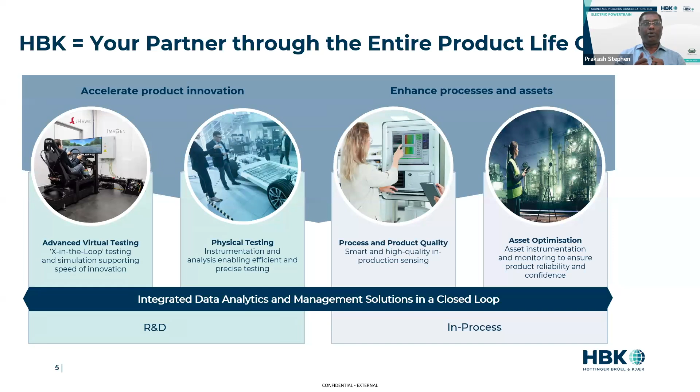So these are our main testing areas, providing complete test and simulation offerings. We divide our product portfolio into two processes, which are R&D and in-process. In R&D, we have virtual testing, for example our hardware-in-the-loop for driver simulations of track and NVH simulations. This leads to zero prototype testing. And how do we do it? It's not only complete virtual simulation; physical testing is a requirement.

And we have precision products, reliable sensors covering key physical properties, ranging from electrical, torque, force, pressure, displacements; data acquisition, high precision data acquisition systems, which help in gathering this data; and software, which gives you insights for user-friendly reliability testing and analysis.

Coming on from the R&D, once you have done your R&D, it gets into the production process. We have sensors built into systems where they can be used to bring actionable insights for precise and smart sensing. These are reliable sensors with high precision, with EMI proofs, explosion proofs. So this goes into the product on a day-to-day basis usage.

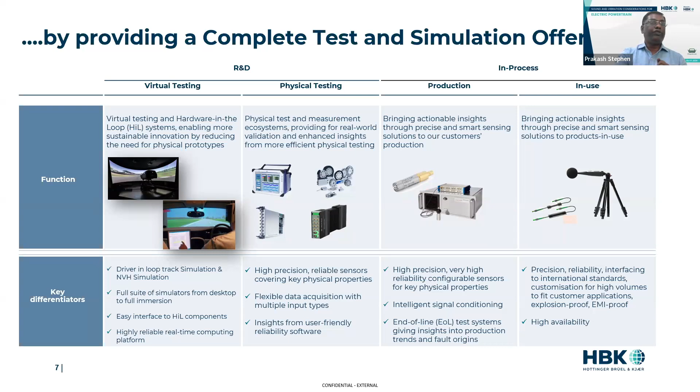2024 has been a very exciting year for us, where we have brought in a lot of innovations into the market, going right from your top left-hand corner, where we have brought in our fusion probes, which are specifically what Marjorie is working on today. And this is especially very useful where there are high voltages and high EMIs, which are there in your electrical vehicle testing or motor testing.

Then coming on to the data acquisition side, we have our eDrive software and hardware, which help you collect this voltage, accelerometer data and NVH data into one single source and help you analyze. So these are some very important new products that we have brought into the market.

And to those people who are already using a lot of other data acquisitions for different DAQs, we have also got our open DAQ architecture, where it helps to interface all the different DAQs on a common architecture so that you could pull in data as and when required from the different data acquisition systems. So that's our open DAQ platform, where lots of other companies are joining us to bring this out.

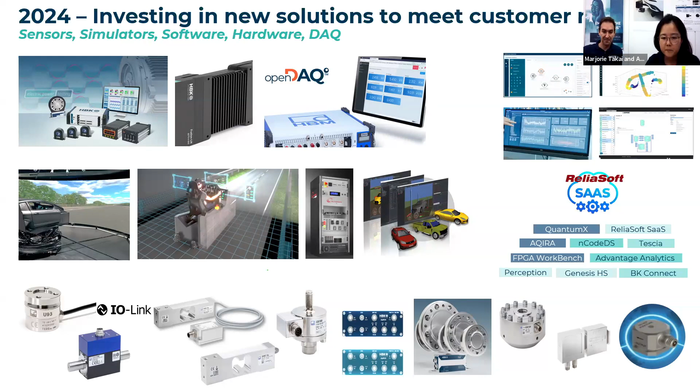And I will do the first part of it, and my colleague will do the second part. So my focus will be on the R&D, and my colleagues will be on the end of line side. So thank you very much for the introduction. So I think I will start here.

Everybody talked about the background. One of the things that I just wanted to emphasize, I've been working with the electrical motor side, but my experience is the sound side of it. So I've been working with sound since 2009. So it's been a while, and I've been working with different parts of it. So I think that we can bring this experience from the sound world into the motor world as we see things are transitioning to the electrical side.

So why should we care about the acoustics, noise, and vibration? Here we'll talk about two aspects of it, and here in the images, we are looking at a passenger car as an example, but it could be anything that has an electrical motor. For example, fridges or small appliances to big ones. So here is focusing on the customer experience of it, and that's the outer side of it.

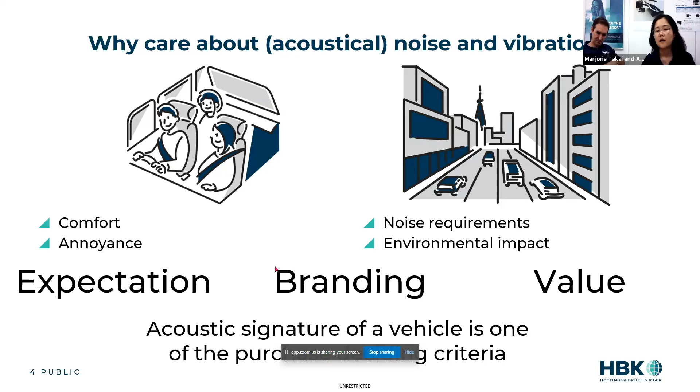So how does it apply to electric power drives? How does it apply to electrical motors nowadays? One of the things that I see very commonly is that we have the motor development, you develop the inverter side, and after you do everything, you throw it to the NVH team, and they do the measurements. But what is the benefit we would have if we do both at the same time?

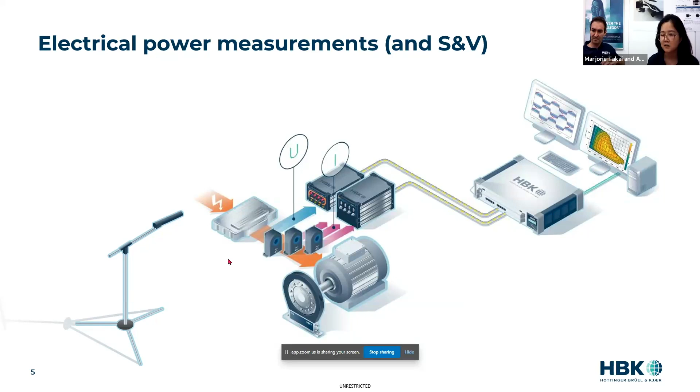Before answering this question, I will go through not the mechanisms themselves, but some of the causes of the sound, noise, and vibration that we have in electrical motors. Very briefly, it's just an introduction, so we can go through the problems.

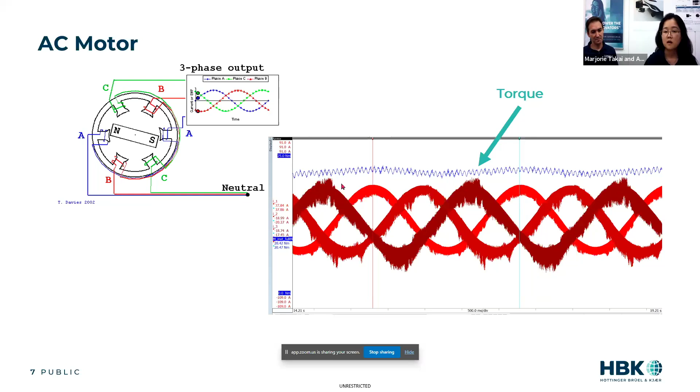One of the things is the constitution of the motor itself. When we excite the motor, because we want to make it rotate, not everything is done linearly. Any body wants to keep moving, but we block it. We have this cogging torque that is shown here, this zigzag line. We have the potential and it will induce movement, but we are trying to control this movement, so there will be an opposite force. It will have an impact on how the output happens. So the motor constitution itself will generate some of the sound, noise, and vibration when we excite the motor, because rotor follows excitation.

And secondly, there's the inverter. Here we have a schematic showing the battery, the inverter, and the motor. Of course, we don't connect the battery directly to the motor, otherwise we wouldn't have movement. The inverter has the role of controlling the motor, and when we do this, we end up having square waves. When you have a square wave, it can be decomposed into sine waves. That's the Fourier decomposition. And we have harmonics of the main frequency.

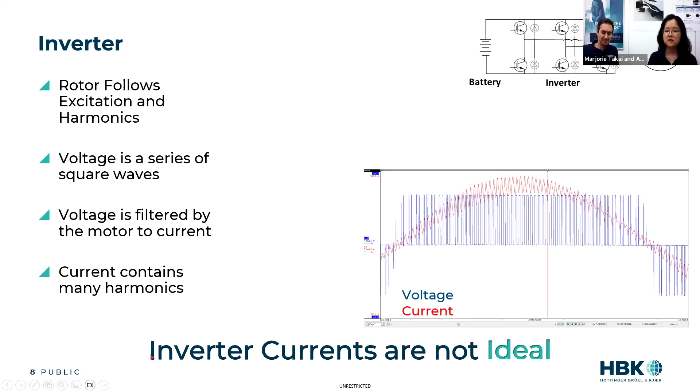So what it does, it injects a lot of harmonics into the system, and it affects the torque in the end. So the inverter affects how the torque output will be. For example, here, the inverter currents are not ideal, so it will inject some torque ripple into the system. And I will talk a little bit about it later.

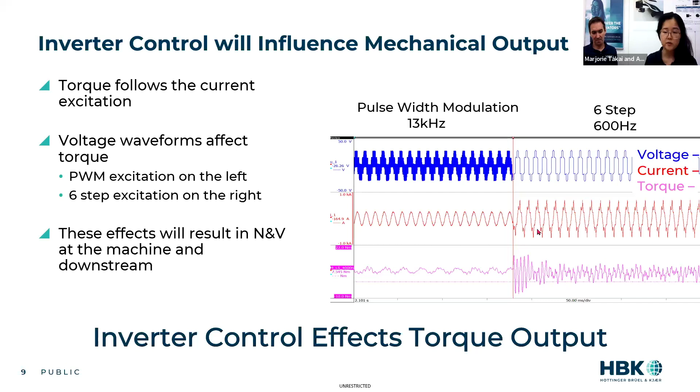Because here in the PWM, we have a kind of sinusoidal wave. We do have peaks and dips, but they are not as prevalent as in the second case. So the inverter control directly affects the output torque. So the second mechanism we are talking about broadly here is the motor constitution and how you control the inverter that's feeding the motor, and it generates torque ripple.

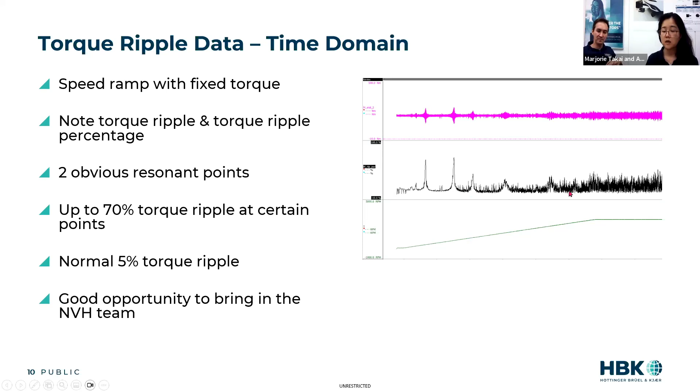So here we have the torque that went through the system. And in the black line, we have the percentage of torque ripple compared with the averaged torque. Here we can see something is going on, although we are just speeding up, and it doesn't happen in all parts of the signal. So that's one of the things that can cause noise and can be investigated. It's just a reminder that when doing this type of measurement, the torque ripple is very small compared to the bulk of the data, so we need accuracy from the sensors and the measurement system itself.

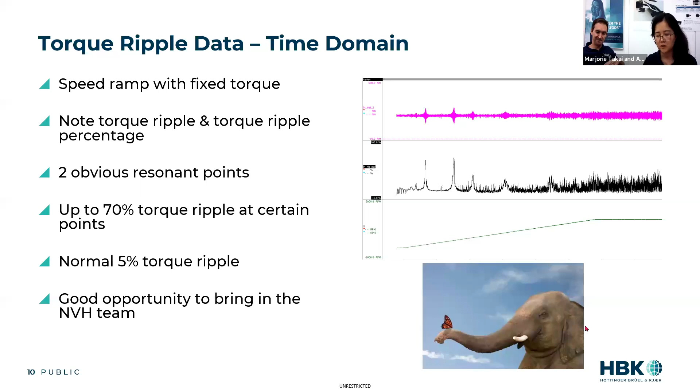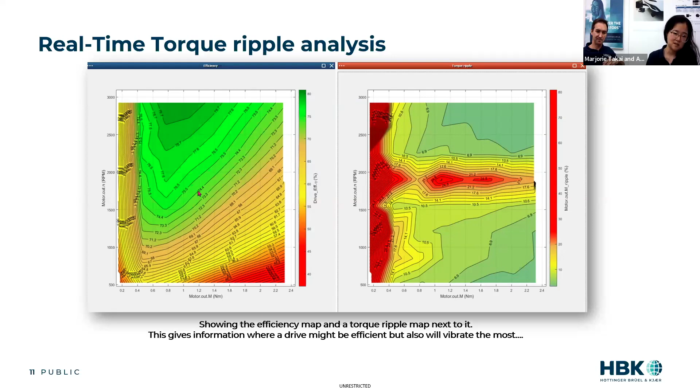So when you're designing your motor and your system and you've measured everything, you have a good efficiency map. Here we have the torque on the x-axis, the RPM on the Y, and the color plot is the efficiency. Oh, we found a very good spot to operate the motor. However, if you measure the torque ripple, it can show that a good operating region can actually be very bad for sound and vibration. I say it can be because in this case we didn't measure these two things together, but that's the thing. And now I'm going to talk a little bit about the benefits of having both measurements done together.

But one detail is very important. When you're taking this type of data all together, temperatures, vibration, the electrical measurements, the sound, you can of course use different equipment and different data loggers. But if you're going to use it to find the root cause of the consequences, that is the sound and vibration in the end, you need to have everything time aligned.

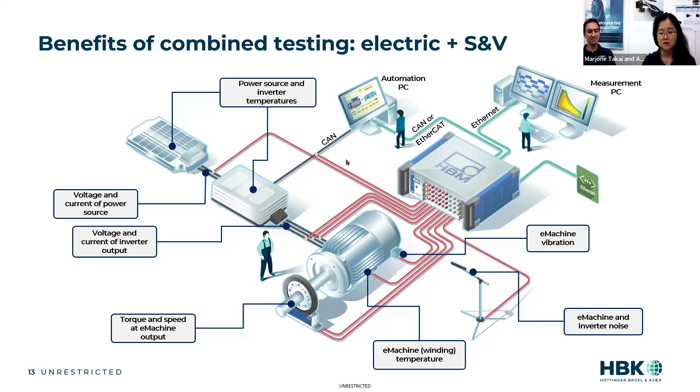Of course, the values are not going to be identical because the current is going through the system. It will have influence, but it will have a different characterization of it. But still, we can start to look out for what causes the noise, what causes the vibration from the electrical side.

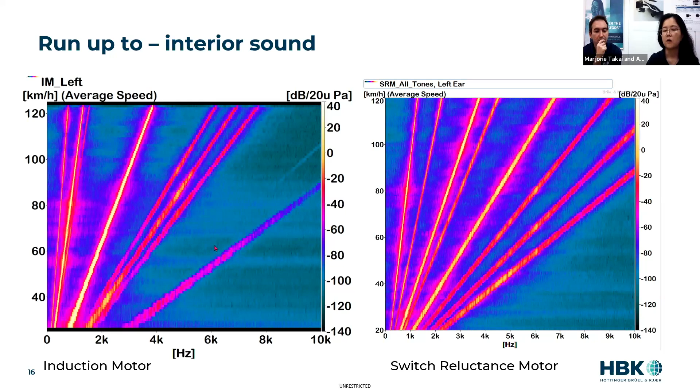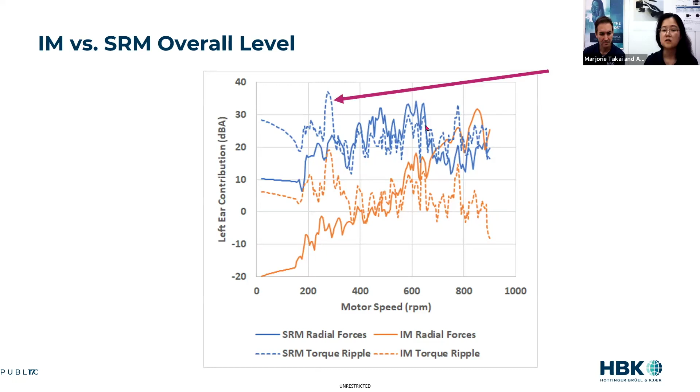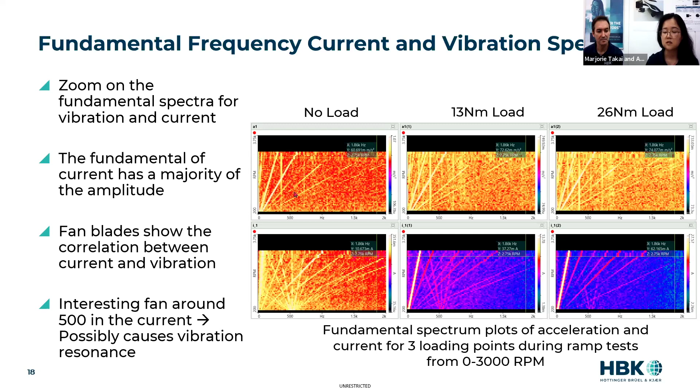So again, some of the benefits of having the electrical measurements with the sound and vibration. We can reduce costs. We can do both of the measurements at the same time. So we don't need to have one team to do the electrical, develop everything and test it, and then test the sound characterization of it. We can reduce this step. So we can develop it faster.

We can mitigate the noise in the control. We can change a little bit of the topology of the motor so we can have less noise. We can have easier communication between teams. We can now use this information faster. So characterize fatigue, failure. And my friend will talk about end of the line as well. We can start having how this motor will behave and have this information on our hands before going through all the steps until the end of the sound measurements.

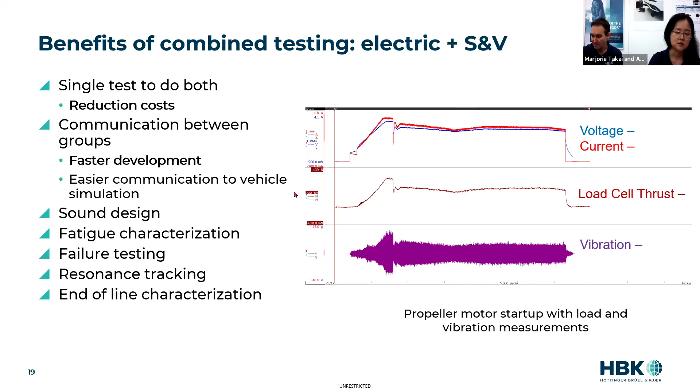So what do we provide as HBK? It's a little bit confusing sometimes because of the nomenclature, but our solution is called eDrive. And I know that a lot of electrical drives are called eDrive as well. So bear with me.

Here, one of the things that we are very proud of is that we do measurements with different quantities. Here we can measure voltages, currents, torque, of course, for the electrical characterization, but also include temperatures, microphones, accelerometers. We can check what we can input, but we can input a lot of things in the same DAQ system. So it allows us to have information broadly, time aligned, in one system.

Also, we are fast and accurate. What I mean by fast, we can have real-time data output. We can calculate some values and give them in hard real time. We are future-proof. That can have a lot of meanings, but for us, for example, if a customer wants to read some data from 30 years ago, they can, because we are very consistent in how we generate and read the data.

Also, maybe I'm using a motor today, but I want to expand. Will I have to buy another system? No, we can just expand the system that is already there and keep the same configuration for things that need the same configuration and be controlled by the same computer. You don't have to have different systems to measure the same thing.

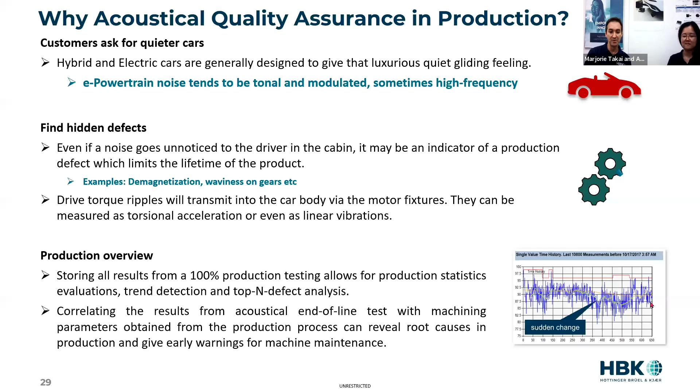So you also want to have an overview of your production. You are manufacturing hundreds of thousands of units every day. You want to know what's your performance, what's your scrap rate, and why I have such a good production, or it's not going so well on certain days, or whatever. So you want to have an overview of it and gain insight into it as well.

So NVH in end of lines, noise and vibration in end of lines, have a broad field of applications nowadays. We literally have hundreds of projects every year dealing with acoustic end-of-line control for e-drive systems as a whole, transmissions, gearboxes, gear testing, and so on.

As a matter of fact, gear testing is a growing market because people are realizing that now that the background noise from electric cars is lower, we start listening also to the gear meshing, and manufacturers want to make sure that they are delivering the gears free of noise, free of nicks, free of waviness, micro waviness, meaning ghost orders at the end of the day as a noise.

So they want to make sure that they are delivering proper gears to the gearbox manufacturer, and the gearbox manufacturer wants to make sure that they are delivering proper gearboxes, noise free, to the e-drive manufacturers. So now we have our background noise in the car going down. Guess what? We start listening to actuators and bearings in electric cars.

Why is that? Actuators are the same physical principle as e-drive systems. You have an electric motor with some gearbox, usually a plastic gearbox, for small actuators. For big actuators like electric power steering, of course, it is a different story. But all of them have a similar noise behavior as e-drive systems. So we have lots of projects for that as well. And that includes pumps and bearings.

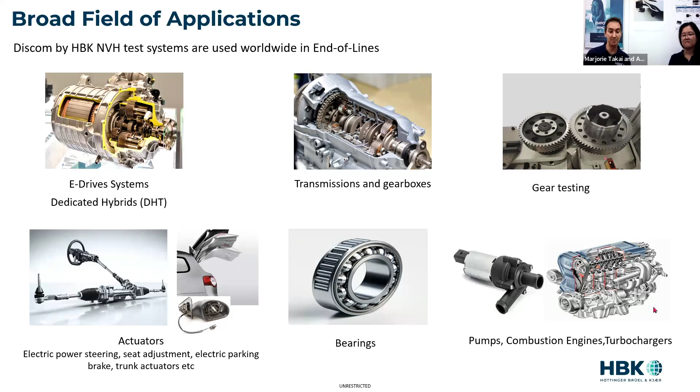What is NVH analysis in production? Well, unlike R&D, there are some special characteristics of NVH systems for production. The obvious one, the first one, is it has to be robust and automatic and fast. We don't have days or hours or weeks to set up the system. So it has to measure in minutes, sometimes even in seconds. And so it has to be fast and reliable.

The second thing is that it has to give you a good/no-good judgment for the product it's testing. So it has to tell you right away, it's OK or not OK. So that's the first thing. So it has a pass-fail limit evaluation.

Later on, you want to know, okay, I have too many NOKs. What's the root cause of this? Why am I seeing such a noise phenomenon so often? I didn't see it before, I'm seeing it now in my production. So you want to have a root cause analysis for that.

You want to handle different parameters for multiple types. Probably you are testing different types of products in the same production line. They may slightly vary in design, but the NVH signature is going to be different, and your NVH system at end of line needs to understand that. So if you're testing eDrive system A or B, it is slightly different, but with different NVH characteristics. The system must understand that and say, okay, for this unit, I need to test this and that. Those are my limits, and for the other one, those are different.

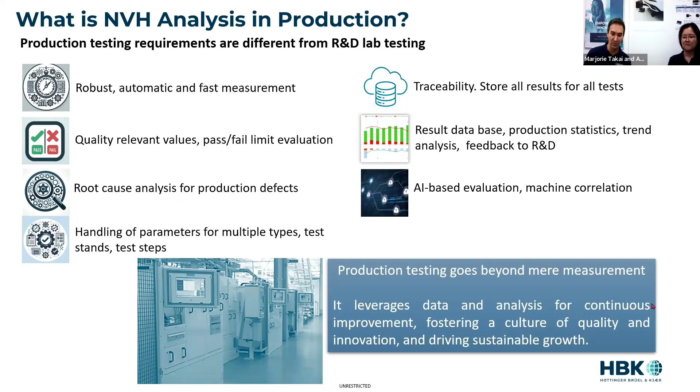Okay, so it always starts with measurement. We need the measurements. And to do the measurements, you need proper sensors, proper hardware. The sensors designed for production NVH end of line differ from R&D. They need to be reliable, designed for being coupled and decoupled from the product under test very quickly. We usually recommend vibration sensors. Sometimes we also use airborne noise sensors like the near field microphone here whenever required.

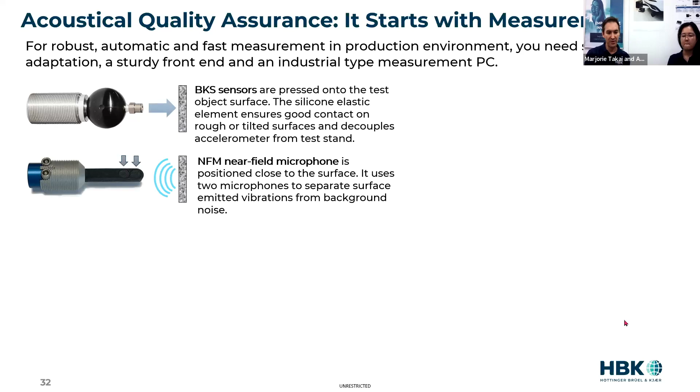Another interesting sensor is what we call the torsional accelerometer. What Marjorie mentioned before, a very important topic, torque ripples. It's in the nature of electric motors. It's in the nature of the thing. So we want to control that, and we can do that in the end of line as well. So the right sensor for that is this one here.

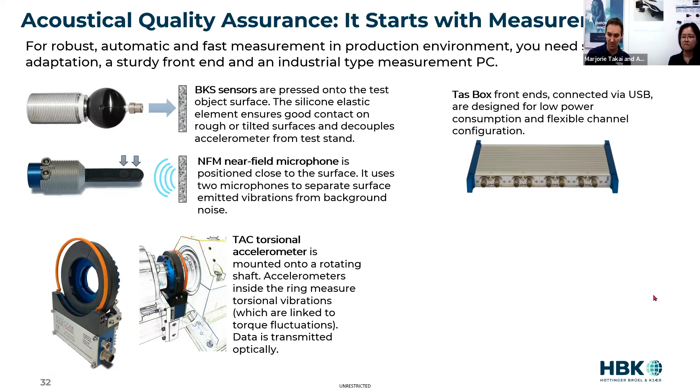It doesn't measure linear vibration, but torsional vibration, which has a direct correlation between torque and the vibration that is transmitted through the body of the vehicle. So we're not measuring torque, we're measuring acceleration, torsional acceleration. We know that there is a direct linear relation between torque and acceleration, so we can do the math here. Also a reliable, robust data acquisition system, an industrial computer able to process all this data quickly and store it as well.

So in order to reliably separate OKs from NOK parts, we use a multitude of values in a multitude of domains. The first one is obviously the time domain of the vibration signal. We use a lot of tools around that. Those working with gears have probably heard about crest and kurtosis. The secret is how you use that. We have some proprietary algorithms that can separate the noise by rotation speed of each shaft. So we not only detect the nick in a gear, we can tell which gear has the issue as well.

That also includes other domains, frequency and order domains. We do order tracking. One interesting thing about order tracking is that sometimes a simple order track just recording the maximum of each point may lead to false NOKs. You may just surpass the limits in a very tiny speed area, which will judge this device under test as NOK, but actually you just don't hear it in the car. So many customers ask our help to test the energy within a speed band instead of just point by point.

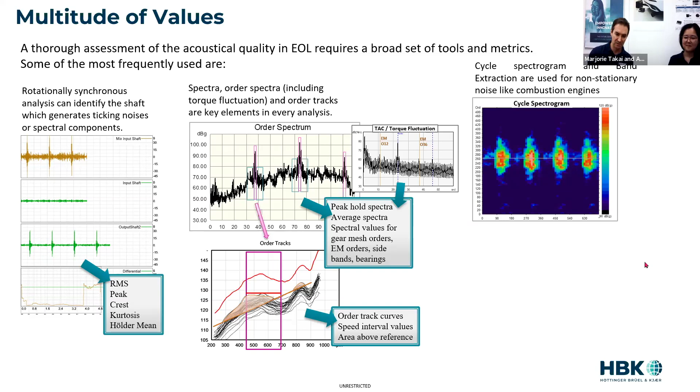Last but not least, modulation. Modulation is a must-have tool for actuators, as we mentioned before. We at Discom use a slightly different modulation technique.

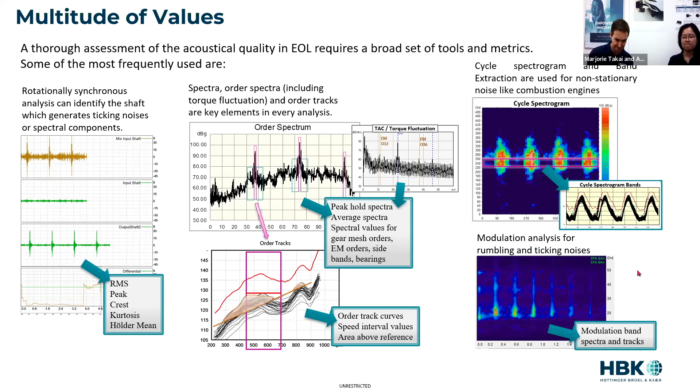We can use that, but we learned that there are better ways to do that. But we don't use, for instance, envelope. The reason for that is that envelope is by nature a low pass frequency filter. And for e-drive systems and actuators at higher speed, we want to see also the higher frequencies.

So for the root cause analysis, we take all these measurements, all these algorithms, and they are mostly based in what we call the synchronous analysis. This is a proprietary algorithm from Discom. We take the time domain noise signal or vibration signal. We separate according to the rotational speed of each shaft of the product. And with that, we can track everything that can potentially be noisy in the product.

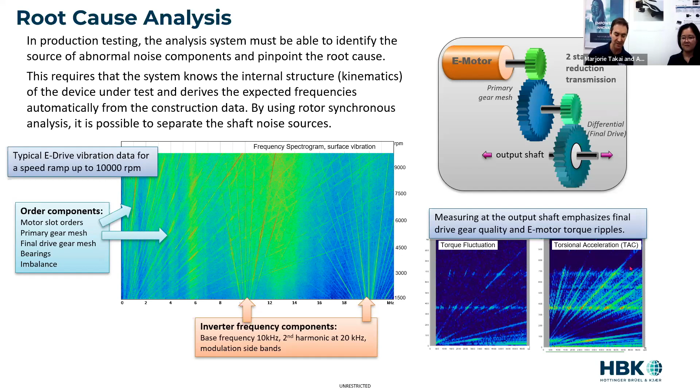So as a perk here, you can see also the consequence of using the torsional accelerometer. On the right, you see how the torsional acceleration, the TAC sensor, can detect the torque ripple there beautifully.

How do we evaluate the limits? So how do you say, okay, how can I classify what is good and what is no good? So basically in the lines, you have two major objectives. You want to find parts that are potentially going to be audible inside the car, but also find defects in parts that might limit the lifetime of it. So in order to achieve both of these, we use two limit strategies.

The first one are fixed limits confirmed by the drive testing cars. So imagine that you put your e-drive system into the car, you drive it, and then you expect from your gearbox which are the major orders based on the kinematics. So you test on the car, and that's the ideal situation. The vehicle, the driver will tell you which are the limits that you should apply in your end of line for the maximum vibration limit for these gear orders or electric motor orders. So those are the fixed limits.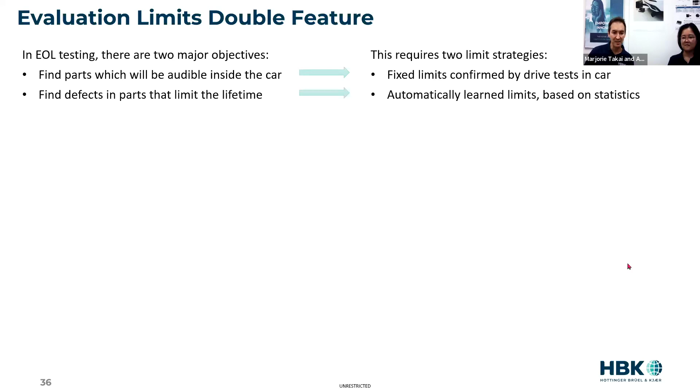Bearing noise. Apart from the 3-4 major bearing frequencies, the ball pass outer track frequency, inner track frequency, and so on, bearings tend to have some very complicated noise to detect. They might be quite broadband, so you don't know which frequency range they're gonna appear, but they appear as a broadband noise.

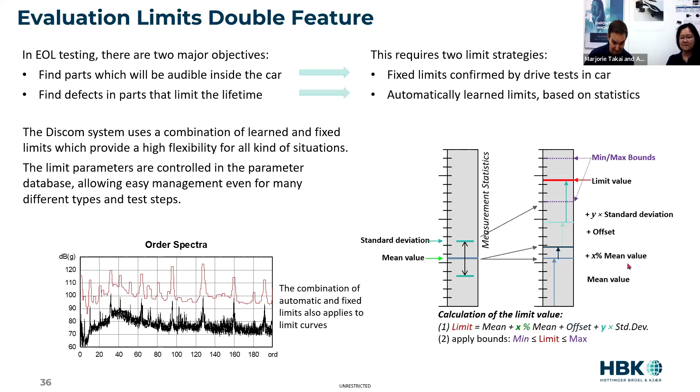For instance, the train frequency: there is no bearing train frequency, but it can lead to a modulation of the whole noise. You probably know that the manufacturer of the bearing is probably going to give you the modulating frequency, but you never know what's going to be the carrier frequency. So that's why you need to monitor the whole spectrum.

So as you know, usually end of lines or productions don't have just one line. You have several ones testing the same product. So here, for instance, you have 4 end of lines, 4 different systems testing the same product. You don't want to operate all these individual end of lines individually. So you want to set up all the parameterization, all the limits, everything centrally, and then you want to distribute the same parameterization to each one of these systems.

So you do that by a central server; it can be a physical server in your manufacturing plant, or can be in the cloud. So here's your computer. You as an engineer, you set up the whole parameterization, define the limits, etc., send to the central parameterization database, and that distributes throughout your end of lines. As a feedback, these end of lines are going to send you all the results back to this central result database. This is very important because with all these results from all end of lines, you are able to draw conclusions from statistical analysis and big data.

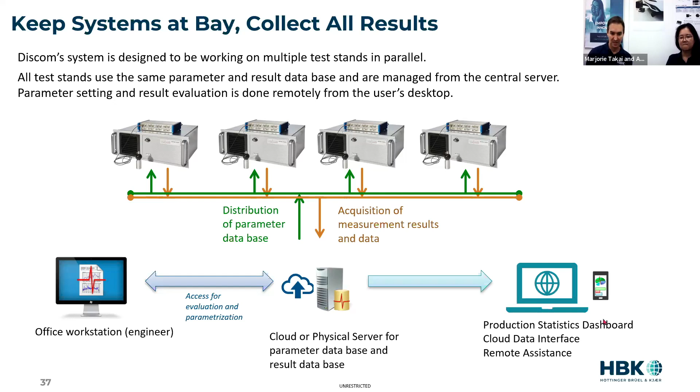So it's all about asking yourself, which trouble is going to hit me today? So our experience is the following. If you have NOK parts, the first thing to troubleshoot is to look at the statistical analysis. So is that one case? Is it happening often? How often does it happen? Did we change anything in our production? Did you switch tools? Did you change the operator? Whatever. So we first look at the statistical trends.

Discom has a tool. You're going to receive a copy of this presentation. Here you see a link for Discom Data Hub, which is the WebPal, the tool that we call. This is our statistical analysis to support our customers. Part of it is included in the package, as a matter of fact.

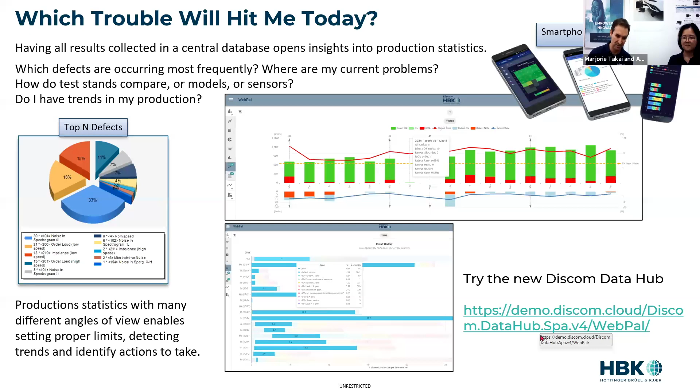So far, so good. What's coming next? What's the future happening now? Is a smart factory. Now you have your production under control, but you know what? I have my eDrive system under control, but what about my suppliers? Can I avoid detecting a defective gear after I mounted it into the eDrive system? Because that's already too late.

It's better late than never, but it could be earlier, meaning can I correlate the data that I'm measuring at my end of line with the end of lines from my suppliers? This is what we are working on right now.

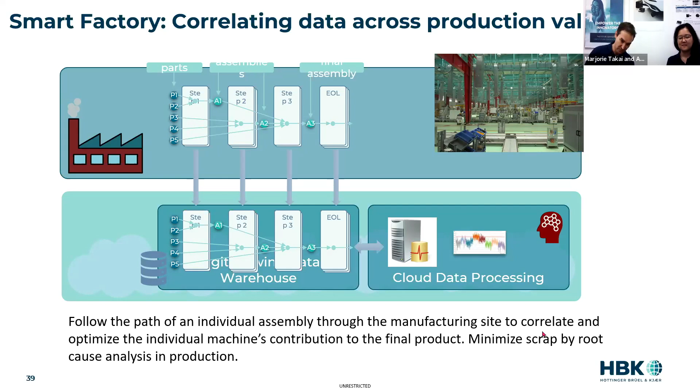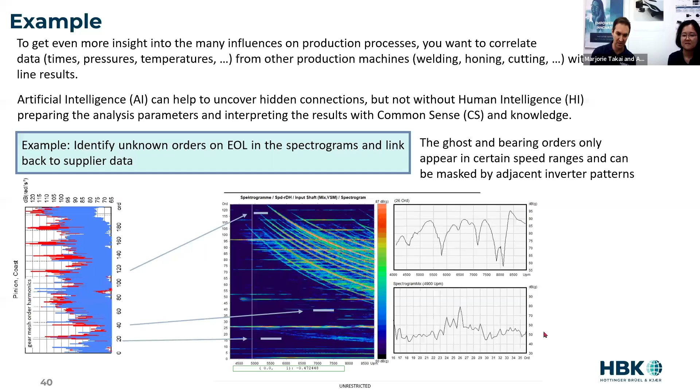So you can see that this ghost order appears there, but not always, not across the whole speed range of the eDrive system. The x-axis is the speed range. So it happens only at certain speeds. So if you have the communication between end user, customer, and supplier here, you can exchange this kind of information and optimize your process as well and gain a lot of insight on what's going on. This is a big trend in modern manufacturing nowadays.

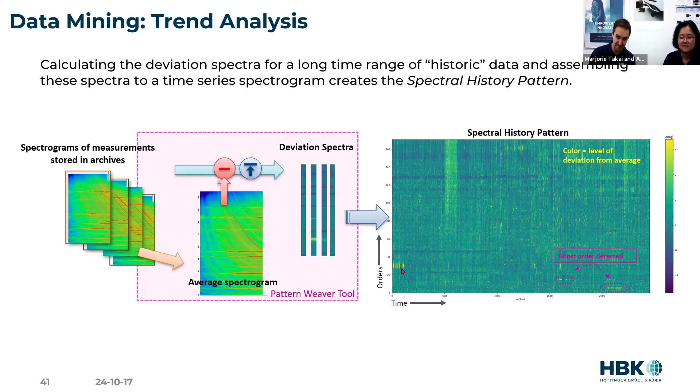The last example is artificial intelligence. So this is especially interesting for actuators. Lots of customers use subjective analysis. So the human hearing separates okay from non-okay parts. How about we have these people judging units as okay and not okay, but at the same time, we measure these units with objective metrics and let the system learn which are the metrics and which are the metric limits that will enable us to mimic the subjective analysis.

So we as operators are teaching the system how to think exactly like we do on subjective analysis. This is a great tool for actuators. It's never going to match 100% because, as the name says, it's a subjective analysis. We as human beings change our mind constantly. So subjective analysis is subjective, it changes. The advantage of computers is objective analysis: once it's set up, for the same input it's always going to give us the same output.

This is my last slide. It's a recommendation, suggestion, if I may. If you want to take this journey about artificial intelligence and big data in production, make sure that you have the knowledge. This is a domain knowledge-driven analysis. It's very important that you have the NVH expertise with you. Because the software or the programming, without knowing what to search for inside your algorithm, is like trying to walk in a maze blindfolded. So it's not going to happen. So we are here to help you on this topic as well.